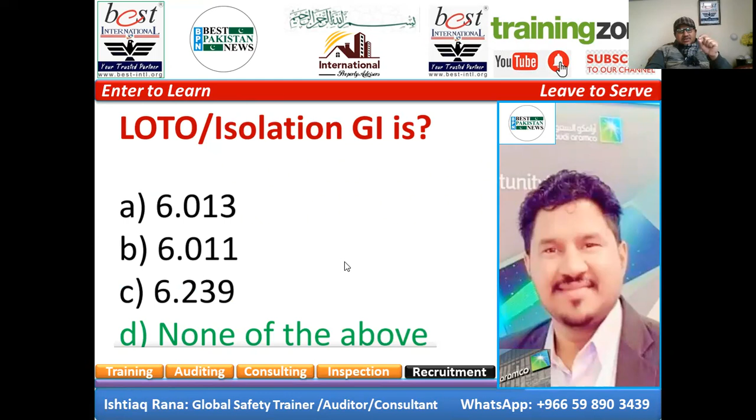Now another question is about lockout and tagout procedures. Sometimes in different institutes you will find two answers correct in the given options against one question - maybe two options are correct, and you truly have to highlight those options if they have given that choice. If they mention only one answer is there, then make sure you select the one based on technical grounds.

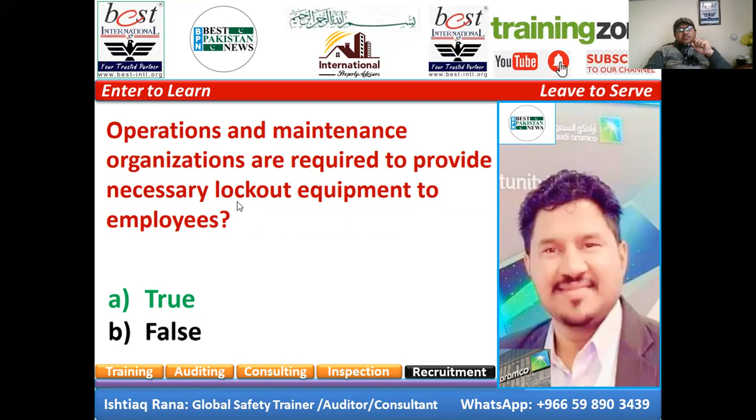Operations and maintenance organizations are required to provide necessary lockout equipment to employees — yes, true. What are the fatal failures? There are 5 fatal failures that Aramco has described. So all of the above is the right answer: stop equipment, disconnect from power source, remove residual energy, prevent unexpected restarting, or clear area before restarting. These 5 fatal failures are highlighted by Saudi Aramco, so the answer is all of the above.

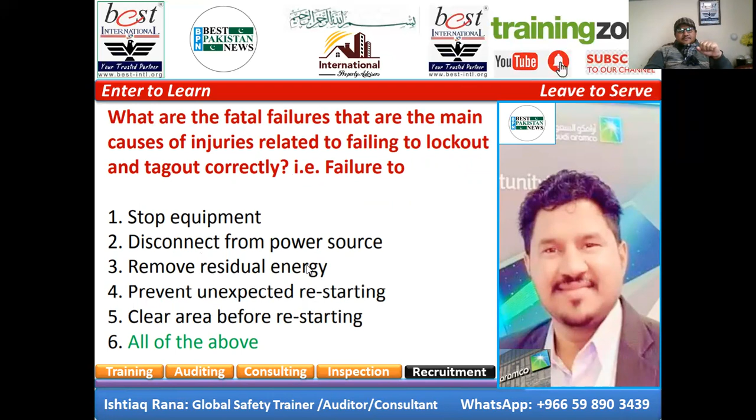Now, the key elements of an energy control program — what are the key elements? Any program in the world requires first of all procedures, then of course it requires training, then inspections. And the answer is all of the above.

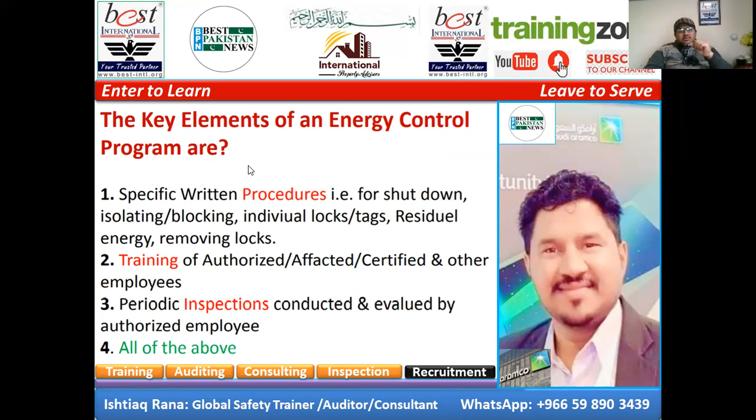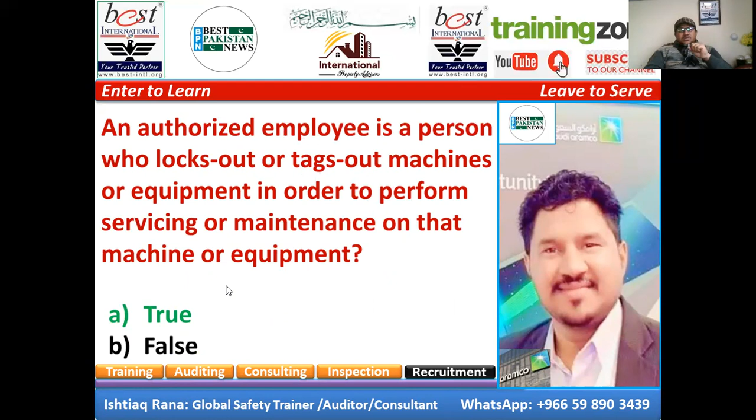An authorized employee is a person who locks out or tags out machines or equipment in order to perform servicing or maintenance on that machine or equipment — so true is the right answer. An affected employee is the person who's basically doing the job in that area. We call it even the person who's going to be the victim if anything goes wrong, God forbid. So we call it the affected employee — true.

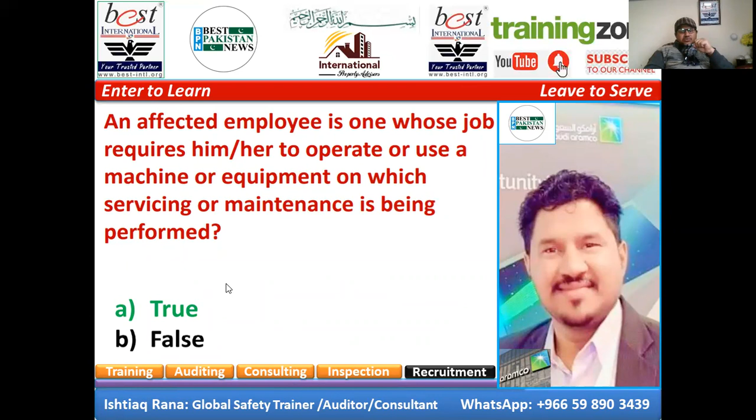Now, isolation procedures — what are the sequence based correct steps? These are the following steps: identify the energy source, de-energize equipment, lock out and tag the energy controllers, switches, valves, circuit breakers etc., and verify that the equipment is isolated. So all of the above is the right answer. First, identify; second, de-energize; third, lockout and also tag, and make sure you also verify. So all of the above is the right answer.

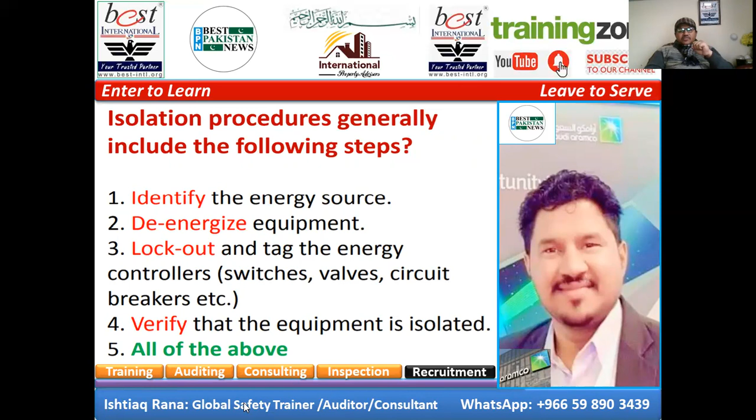Equipment isolation as part of a LOTO program must be completed and also verified before a work permit can be issued. So as a work permit receiver, you can't just blindly sign the work permit. You need to go for a joint site inspection, and during that inspection you double check the area is isolated, de-energized, and no energy is there. Then you definitely sign the permit after correctly filling and verifying each particular point on the permit as well.

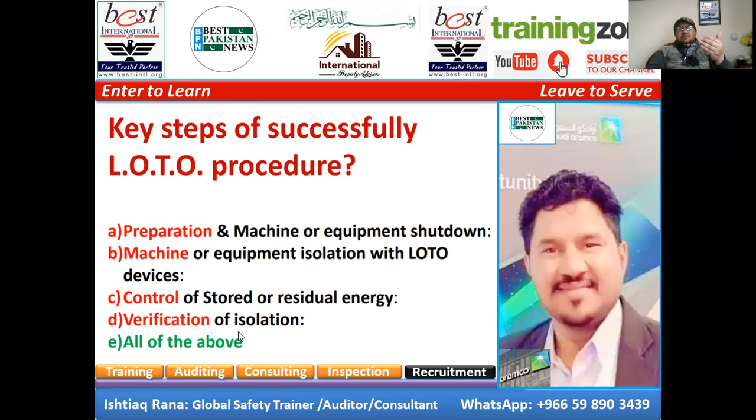Now, Saudi Aramco's electrical lockout tagout program has the following key steps: lock, tag, clear, and try. True — all of the above, right? Lock, tag, clear, and try.

Now, procedural steps for removal and re-energizing equipment — what we're going to do once we want to remove or re-energize equipment: make sure you restore the work area, notify all personnel — it's a game of communication — and also remove lockout tagout devices. So the answer is all of the above.

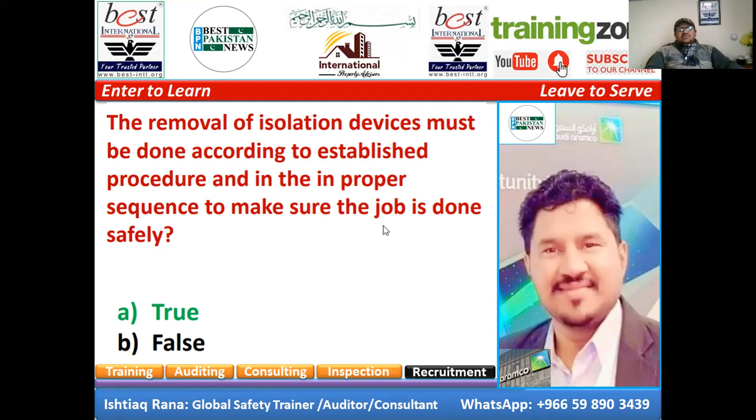Now, the removal of isolation devices must be done according to established procedure in the proper sequence. So sequence is important to make sure the job is done safely — yes, true.

For this multiple question and answers, two important points bear in mind. One is either you clear your concepts, or you must have a strong memory to memorize. But to be very honest, relying on memorization sometimes makes you fail. The other part is if you clear your concept, take each question and understand why the answer is true, why option number 3 is correct. Stay on that question and understand technically and logically, then see the result, inshallah. You will never forget, because you have made your concepts clear technically.

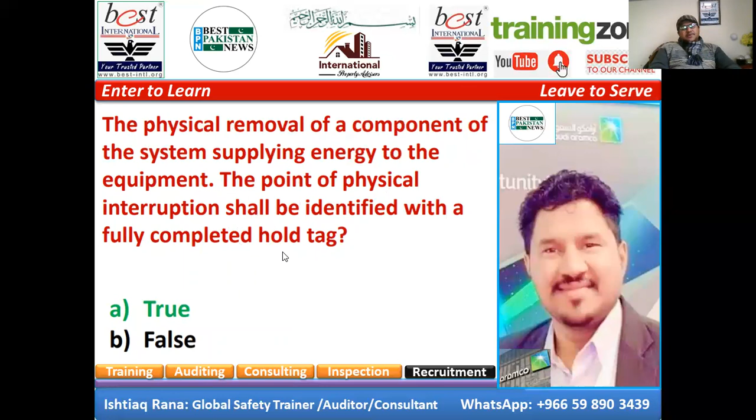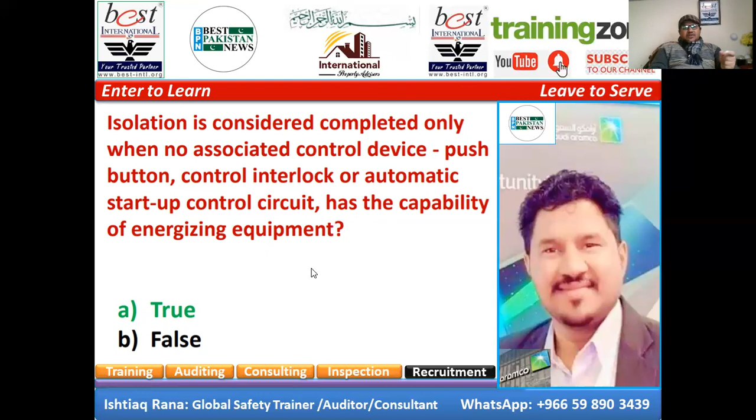Okay, let's take another question. The physical removal of a component of the system supplying energy to the equipment, the point of physical interruption shall be identified with a fully completed hold tag. True. Isolation is considered completed only when no associated control device, like push button, control interlock, or automatic startup control circuit, has the capability of energizing equipment. Because isolation means complete disconnection or removal of any sort of energy. It could be automatic, interlock controlled, or push button. But make sure it is not going to be re-energized, so after locking and tagging, someone has to verify. So true is the right answer.

Now, primary methods. Aramco has guided different methods, especially 4 different methods. The primary methods for isolating process pipelines and equipment used in Saudi Aramco are single block valve, double block and bleed, disconnecting piping, or blinding. So the answer is all of the above. But bear in mind, single block valve and double block and bleed, both methods are not acceptable for confined space isolation. I repeat, both methods are not acceptable for confined space isolation. So for confined space, disconnection or blinding, both methods are acceptable. I hope it will help.

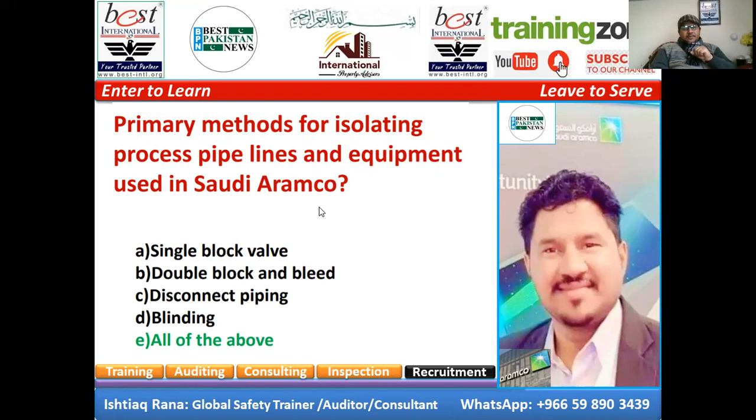Now, single block valve needs to ensure that the block valve is fully closed. Look at the picture of a single block valve. What you're going to do is the block valve is fully closed, locked and tagged. The inside fluid is removed from the system and the valve tested for leakage, least desirable method for use in hydrocarbon service. So the answer is all of the above.

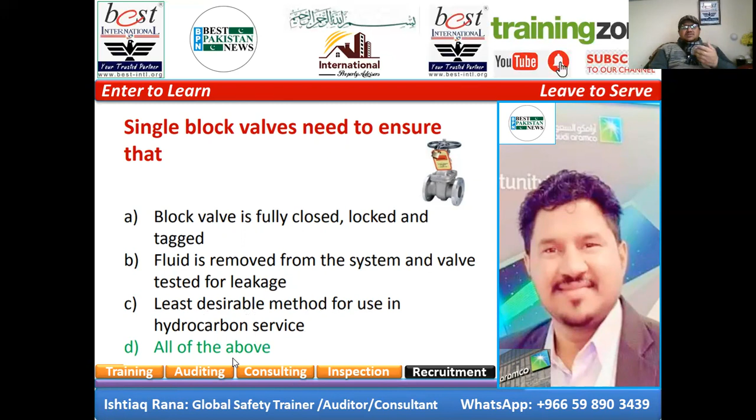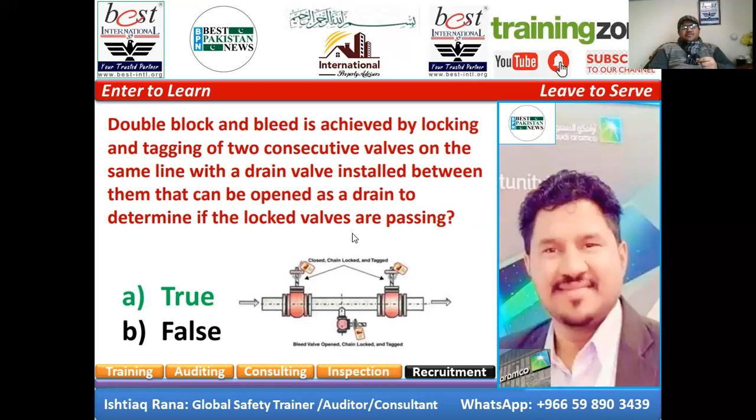Now, double block and bleed. That means on the same line, two blocks are there, that's why it is called double block and bleed. It is achieved by locking and tagging two consecutive valves on the same line with a drain valve installed between them that can be opened as a drain to determine if the locked valves are passing. So true, the answer is true.

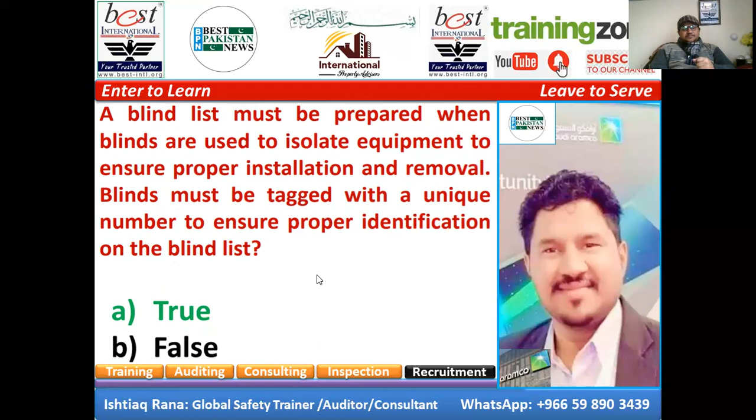ESO, we call it electrical systems operator. True.

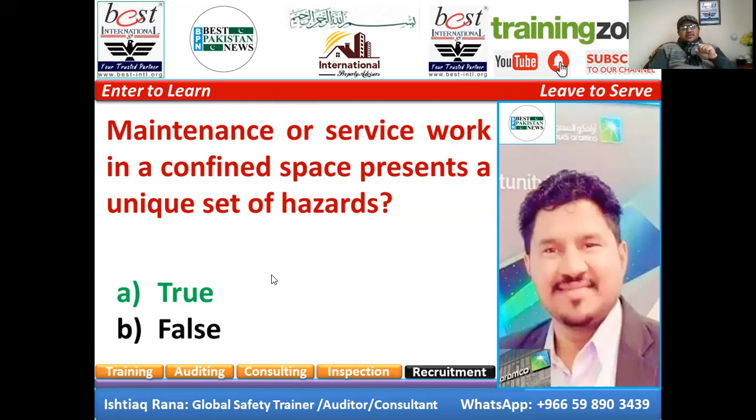Maintenance or service work in a confined space presents a unique set of hazards. True. Because you're talking about confined space, any maintenance or service project in a confined space could have a unique set of hazards. That is why we have a sequence of safety regulations to be followed before we even start confined space entry, even to go inside, rather than starting the project itself.

Now, inserting a blind sized and rated for the proper pressure in piping nearest to the confined space is essential. Yes, it's imperative, because the selection of blind is critically important, based on the rating capacity, the location, and the size of the blind. So three important criteria to select the blind. But facility-made blinds can be used once and later they have to be destroyed. The facility-made, locally fabricated blinds, sometimes because the blinds are not in stock and need to come from Germany or the USA or somewhere else. So what Saudi Aramco does is they have workshops and try to locally fabricate as per the same material specs, but still that facility-made or locally fabricated blind can be used only once, not twice.

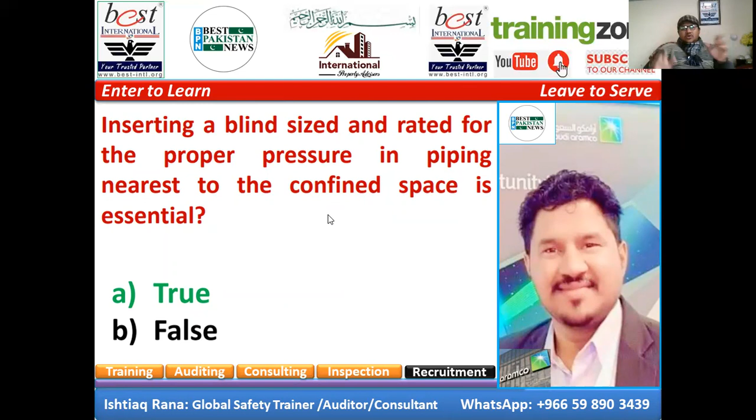Now, confirm adequate lockout or tag out, or both, of potentially hazardous stored or residual energy are included as part of confined space entry permit review. True. A hydraulic line can break and spray flammable liquid, resulting in fire and explosion. True. So we have to be careful whenever there is a hydraulic line which can break and spray flammable liquid, and of course, since the word flammable is used, this could create fires and explosions. So true.

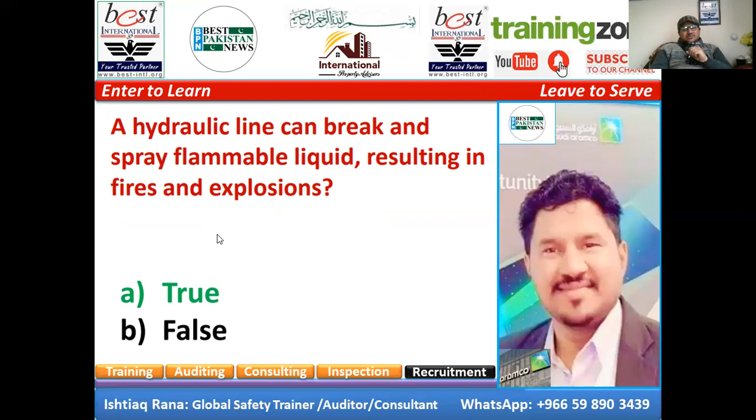Now, hydraulic power energy is a form of stored energy, potential energy. True. Never take a chance with hydraulic pressure because you may never get a second chance to do it right. True.

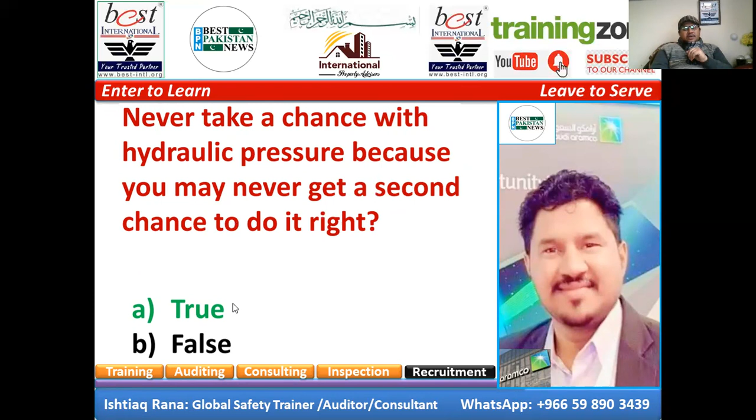A group lock box must not be used when several crafts are involved in a service or maintenance job. No, it's false. Because whenever several crafts or a lot of people are working together for one particular maintenance job, instead of having each one put a lock on each identified point, much better is to use a group lock box.

Now, what is the procedure to use a group lockout? First of all, bear in mind option A is an operations representative shall lock and tag each isolation point with a single keyed lock. The maintenance supervisor foreman shall lock and tag. So one lock from operation, the second from maintenance supervisor foreman, and then maintenance supervisor foreman keys to these locks are placed into the lockout box.

Multiple lock clips or hasps are then attached on the closed group lockout box. The operation representative shall place its lock and tag on the box or hasp first and maintain possession of the key until the job is complete. So operation is the first one to lock and the last one to remove the lock. And each member of the maintenance crew shall then place his lock and tag on the multiple lock clip and maintain possession of his key until the job is done. So all of the sequence of steps are correct. So the answer is all of the above.

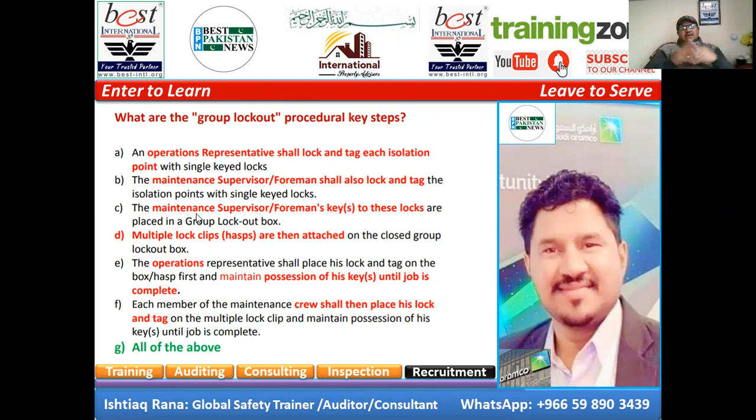Bear in mind, for lockout tagout, this is the only procedure where you will not rely or trust on anyone. Your life, your safety, your responsibility. You are the one going to place your lock and you are the one going to remove your lock. You don't share your key with anyone. Okay, you don't exchange keys with anyone. You don't even ask any of your friends, can you open my lock as well? No, you can't do like this, because uncontrolled energy can kill in seconds actually. It's a game of milliseconds sometimes.

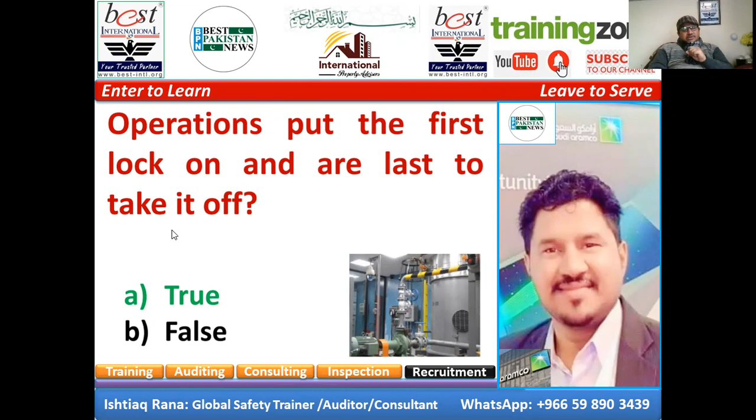Now, operations put the first lock on and the last take it off. Yes, true. All staff who operate or perform work on the equipment must be trained in lockout tagout. True. The golden rule is lockout tagout before you start work and remove only when you have confirmed that there is no possibility of injury to workers. Correct. True. The whole task must be completed with 0% mistakes. Yes, absolutely right.

So these are some of the golden rules actually, how you're going to use your locks. So that means you need to make sure you are putting your lock and keeping your key or putting inside the key, and then the operation is the first one to put the lock, the last one to remove the lock. So the sequence is correct.

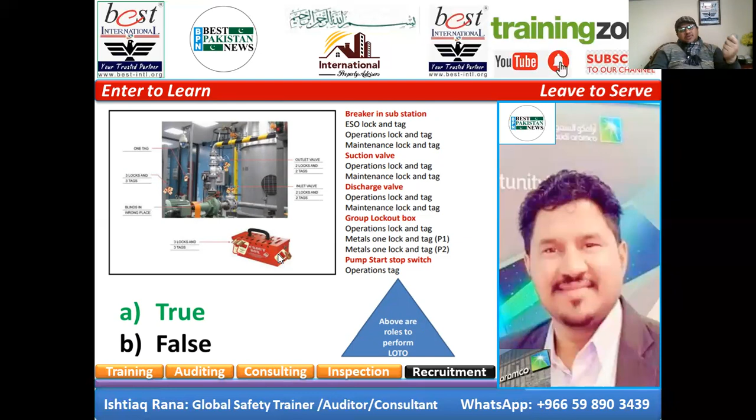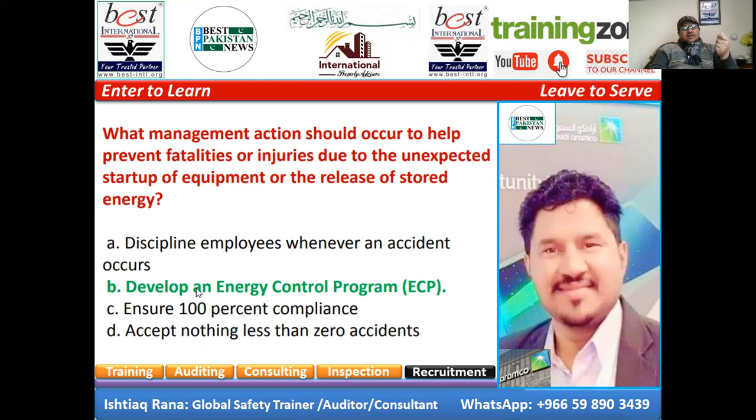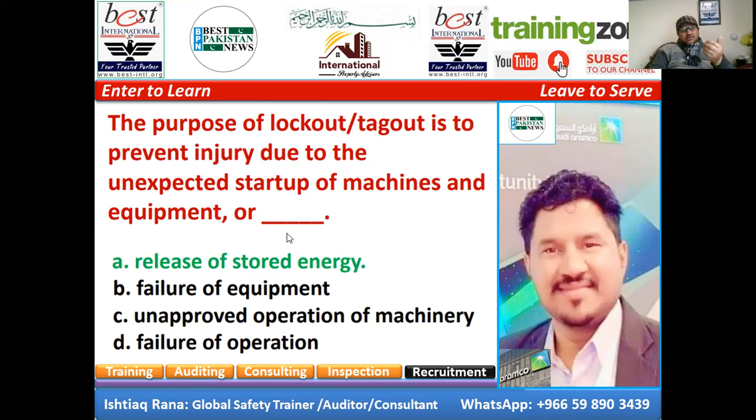Now, what management action should occur to help prevent fatalities or injuries due to unexpected startup of equipment or the release of stored energy? Like discipline employees whenever an accident occurs, or develop an energy control program. That is the best strategy, develop an energy control program. Another question, the purpose of lockout tagout is to prevent injury due to unexpected startup of machines and equipment or release of stored energy, residual energy. Unexpected, not usual, scheduled or regulated startup of machines and equipment or release of stored energy.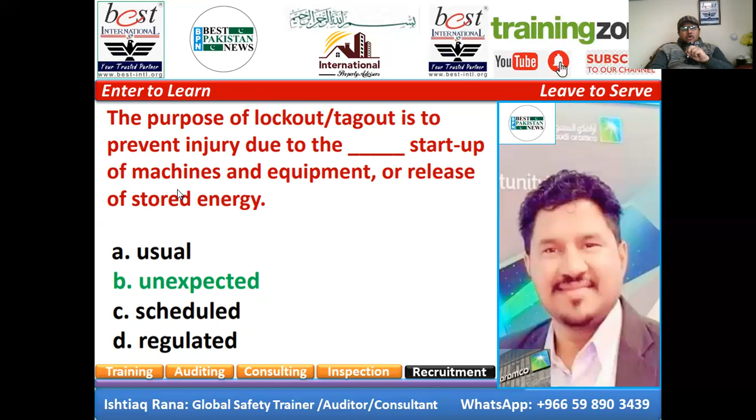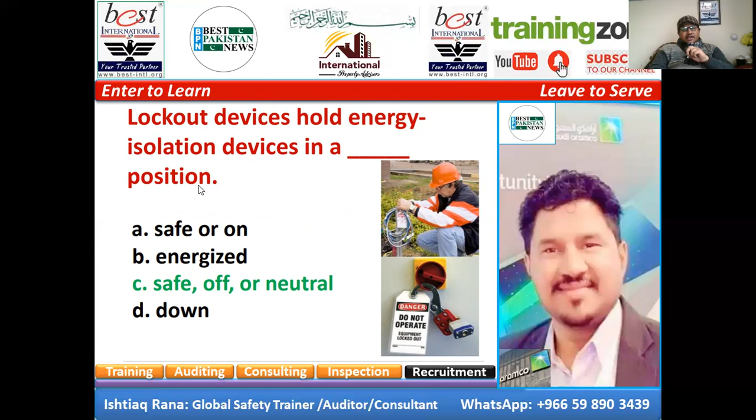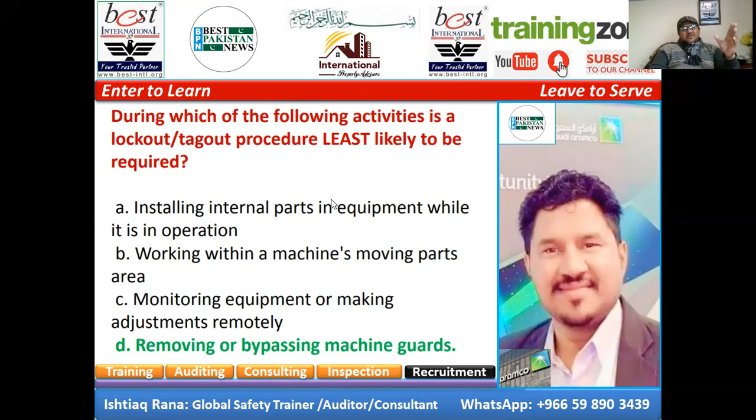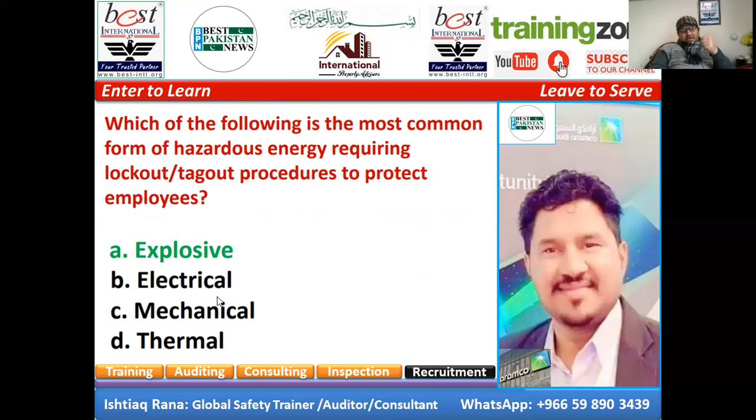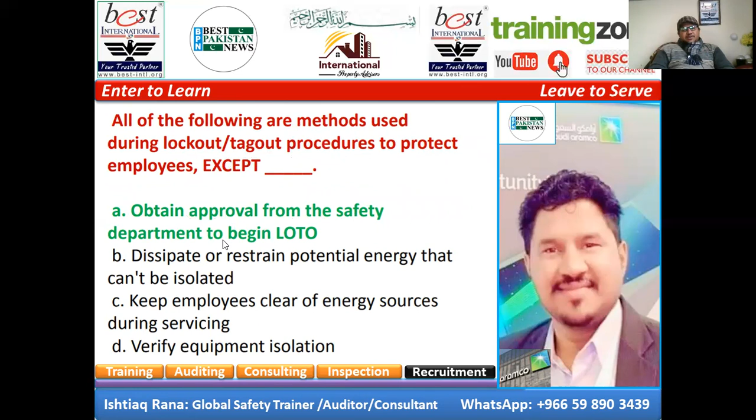Now, which of the following is the most common form of hazardous energy requiring lockout tagout procedures to protect employees? Explosive, electrical, mechanical. So explosive, that is the first energy we require lockout tagout for. Now, all of the following are methods used during lockout tagout procedures to protect employees except obtain approval from the safety department to begin LOTO. That is the right answer.

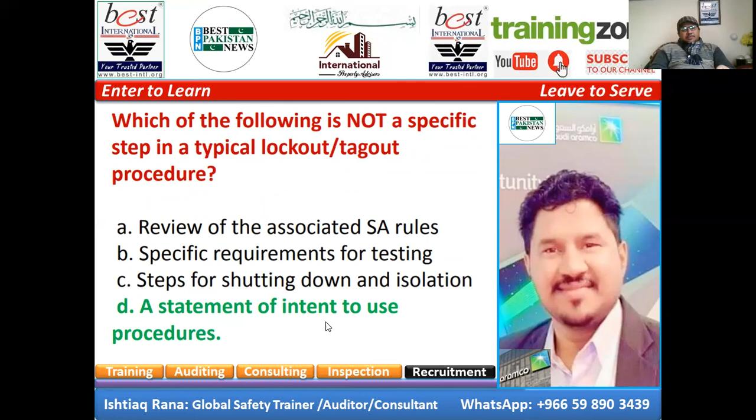Which of the following is not a specific step in a typical lockout tagout procedure? A statement of intent to use procedures. Whenever new machines or equipment are installed or replaced, energy isolating devices for such machine or equipment must be designed to accept a lockout device. So the machine needs to be designed in a way that it is quite easy to put a lockout device, because whenever there is a repairing project or maintenance project, even inspection or overhauling of the machine, we need well designed places to put our lockout devices.

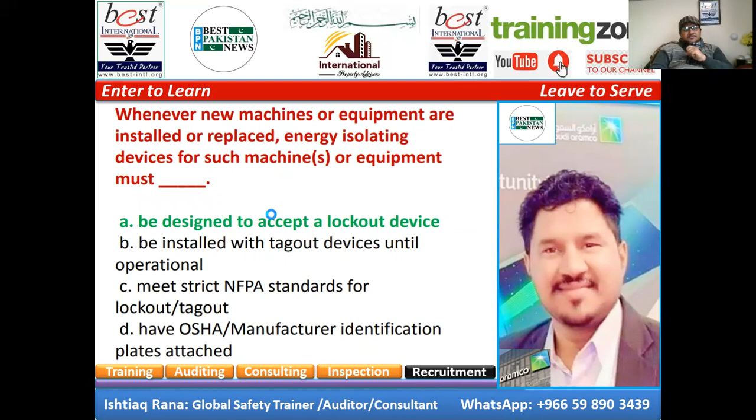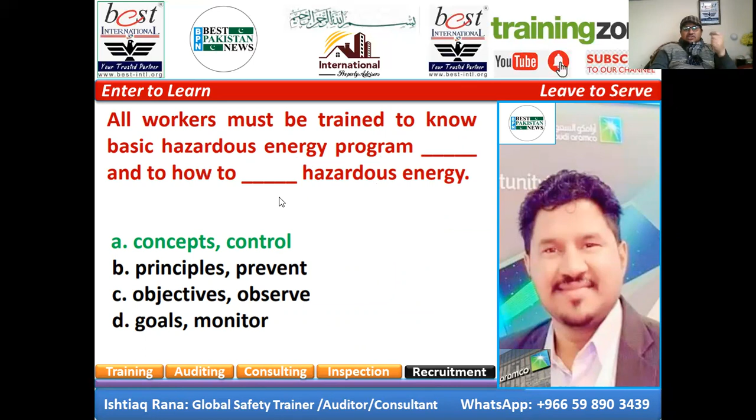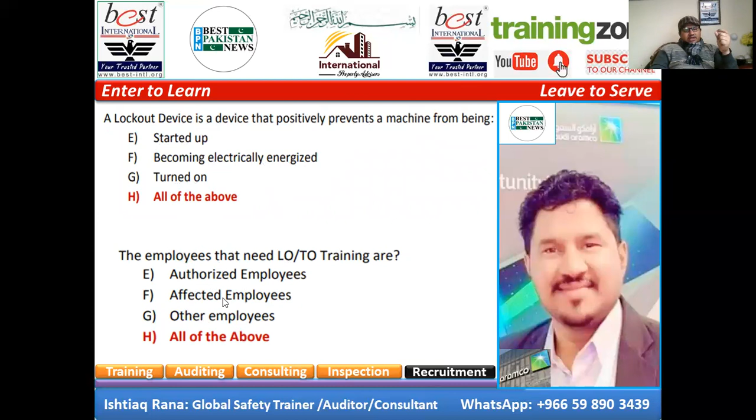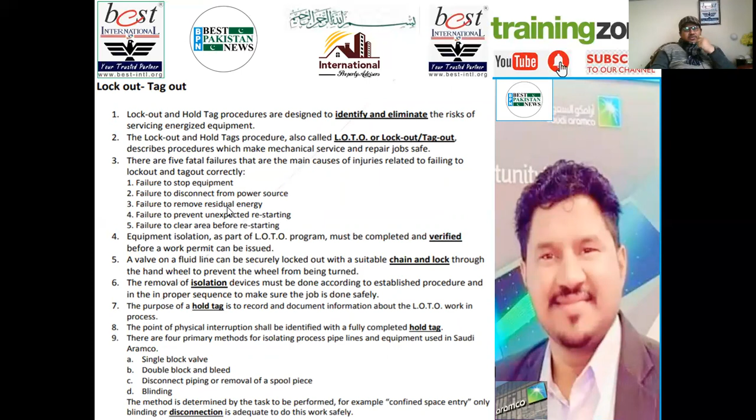So these are some of the notes. Maybe it can help you if you just want to take a screenshot; these are a summary of some points. Okay.

So thank you very much for watching. I hope it will be helpful for all of you, especially for lockout tagout. And these questions are the important ones. As I told you, as an examiner, as a student, as a WPR student, as a Saudi Aramco examiner, or even a third party training institute examiner, both ways you can use them, because Aramco has given some sets of questions to third party institutes. So I hope these questions will be very helpful to all of you.